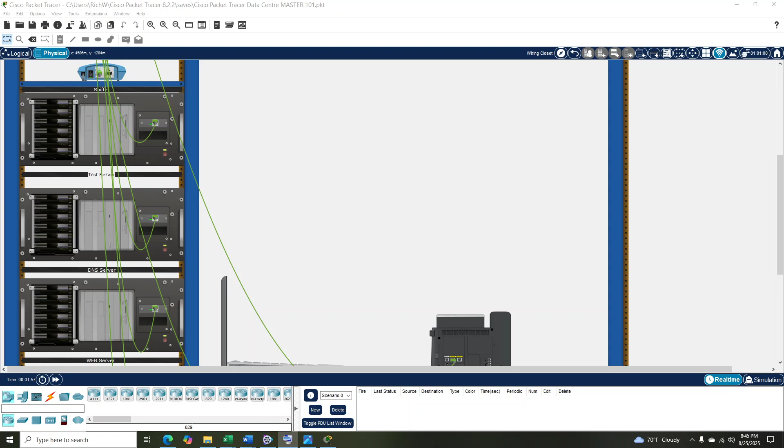It's going to be our piece, our DC1 server. DNS server, that's all set up.

Web servers set up, DHCP servers set up, and we got an Avaya utility server all set up, patched over Avaya, set that thing up, got the phones working. Now I do got the phones working, Cisco phones through the routers.

Let's see here, this is the headquarters. Oh, there's Bill Gates' laptop. It's all configured, Bill's phone number, can't give it out right now.

This is some testing, later in the video I'll explain this, and we're going to zoom back out. Over here I still need to wire these guys up back to the closet, and we have management over here.

And there's everything, there's a router. Don't have the phone set up or laptop here, but we got all that done, and we will start it up in a minute here.

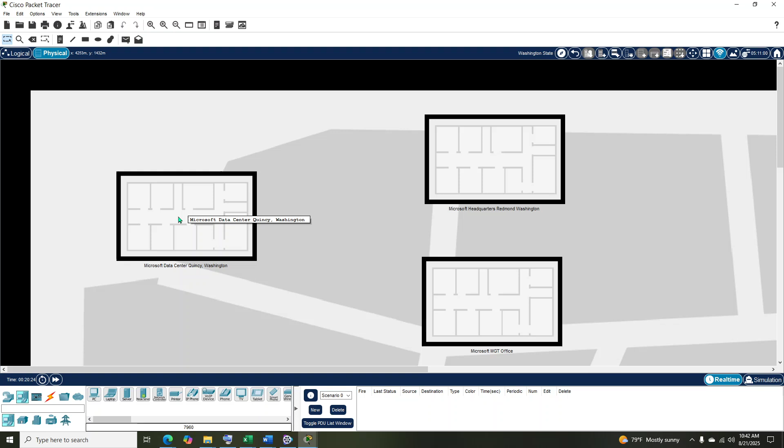On the data center, not too sure how many buildings they got there, but we just got one big building right here now. So we got the data center, and we've already put in our main wiring cabinet.

I've already started here with the racks. I've got 4 racks, another rack over here. I've got a laptop and an IP phone, and put a server in there. So let's start putting stuff in there. What we need, it gives you the power. We'll put power up here.

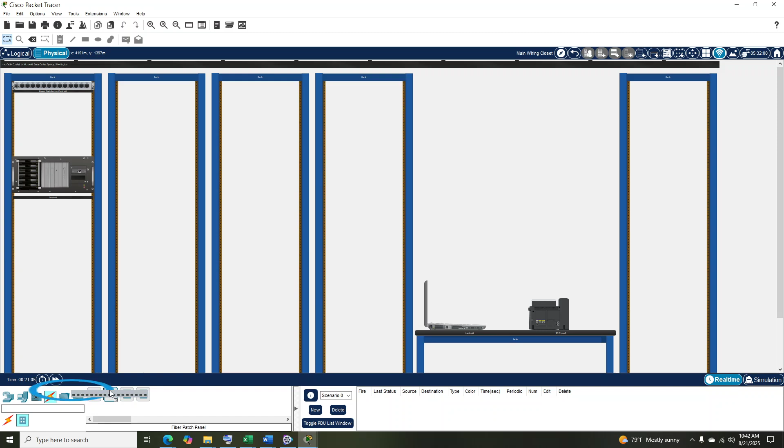And we're going to start adding some things that we're going to need for this. We're going to need a fiber patch panel, and we're going to need a copper patch panel. Put that there. We're also going to need a, let's see, we need over here. We're going to need...

A switch, layer 3 switch. I believe this one here - no, that's not the right one. We will delete that, and let's see, this is the one I was going to use. It's our fiber switch there, and this is our layer 3 switch here. I'll cancel that, back up to here.

Alright, we'll space it out a little bit. Put in a server, and let's just start popping these servers in. Once - there we go, put that at the top. And we're going to need a switch.

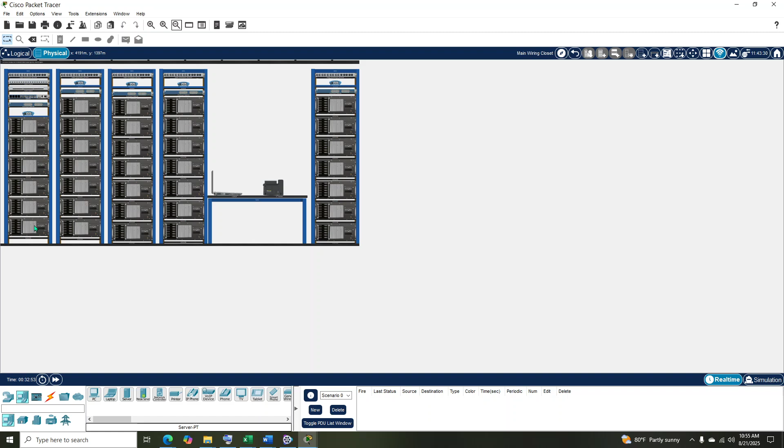Okay, got a little room here. But if you put fans and everything else in here, which we can't put - no, they don't have fans in here. These fans are on the top, and they're rack fans that blow down. Plus, you got air conditioning in this room.

Let's see. All right. Okay, we don't need that - I didn't just realize that, but we'll leave it there anyways. All right, still a little cleanup here.

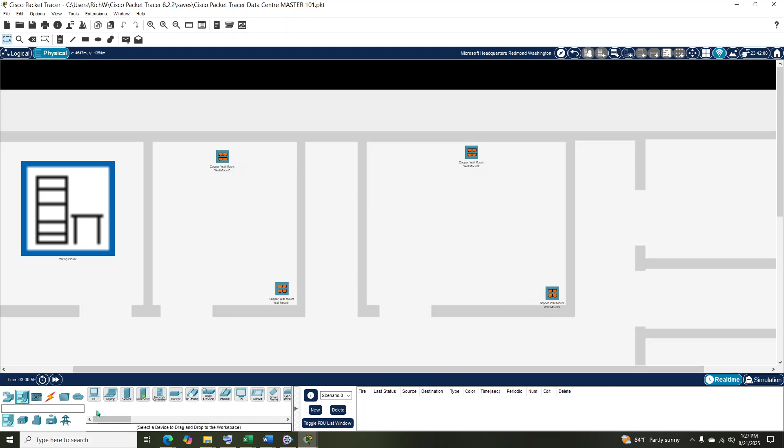Okay, now we're going to get some PCs. Okay, we're going to save that. Okay, we haven't done the wiring yet. No wiring yet. Setting everything up.

Okay, it's at a wiring closet. Okay, there's our wiring closet. And I'll just kind of do the same setup here. Let's see, get a rack in there, a server in there. Distribution.

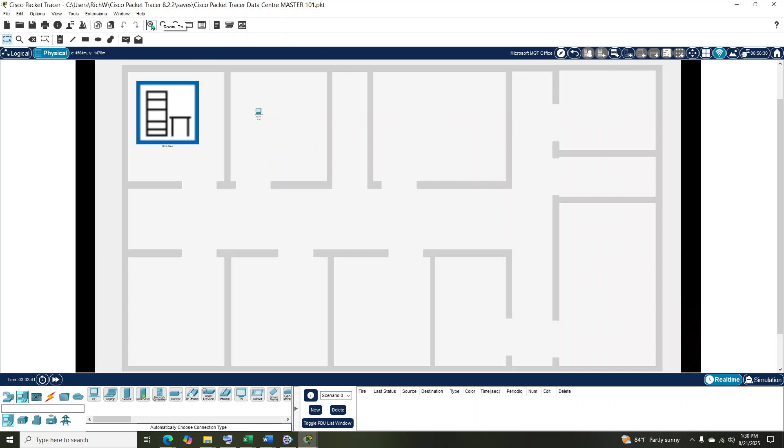Okay, let's see here. Let's see. Okay, we'll go back to the office and we'll do the same setup here. PC, PC, PC.

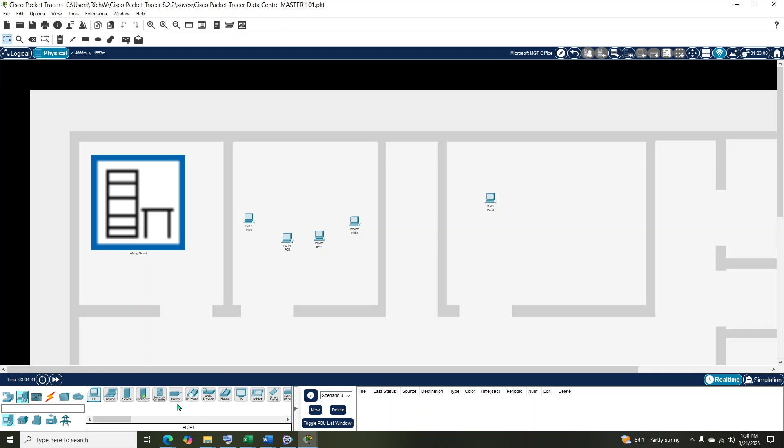We also want to put a printer over here. I forgot to put the printer on the last one. Put a printer there, put a printer over here. And we're going to put some phones in here too, IP phones.

Okay, these would be like cubicles, we'll call these like cubicle. And let's get the copper here - copper here, I don't want that one, I want this one. And one down here and one down here. And let's get our phones over here. Okay, let's see, IP phone here, going here.

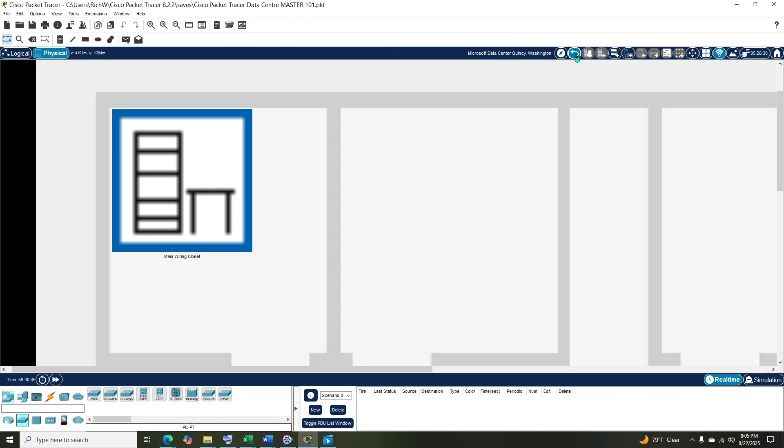There's a sniffer in each. I'm gonna tie these to the switches here. Let's see, what we're gonna do is go back out first, and we're going to start doing the gigabit.

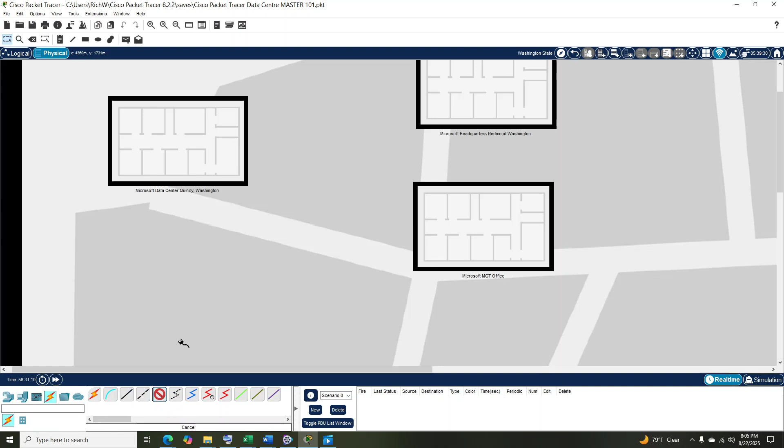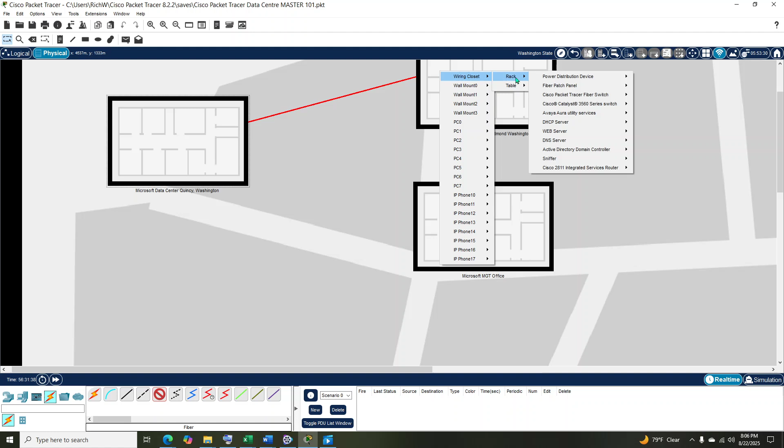Fiber. Wiring closet. Okay, we're going to do the punch down. Punch down 1. Okay, let's see, wiring closet, patch panel, punch down number 1.

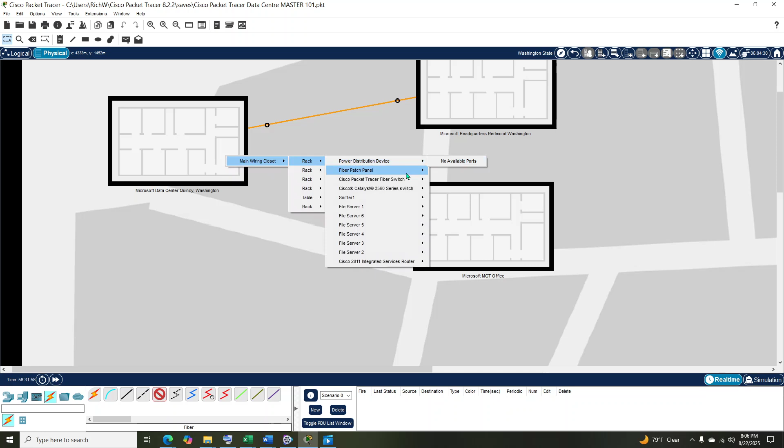Got that, let's do another fiber cable here. Grab the fiber cable and pop this guy. Let's see, this guy, and we're going to go to punch down number 2. Hit this guy with wiring closet number 2, keep it consistent. Alright, he's 2. Okay, he's 2.

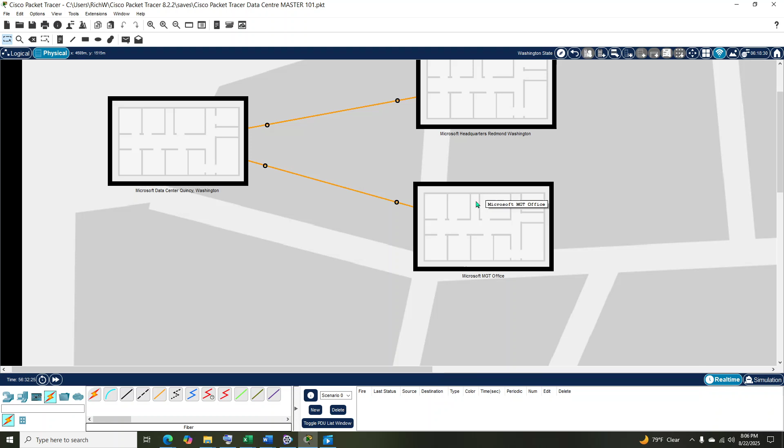And I'll go do this one. Let's go another one, fiber. We're gonna grab this guy and rack fiber. Punch down, we're gonna go 3 with this guy. Punch down 3, and this guy's gonna be, we're gonna go punch down 3.

Okay, let's see, move this down here. Move that over there, move that down here, go up here. Let's do it this way. And that's good. Yeah, good enough, alright, got that.

Little closet, it's data center. Okay, there's our 2 cables we did, and they're on this one and that one, and we have 2. We're gonna have to add to this thing. Let's grab a cable, it's fiber, and we're gonna go with number 1, and we're going to hit this guy.

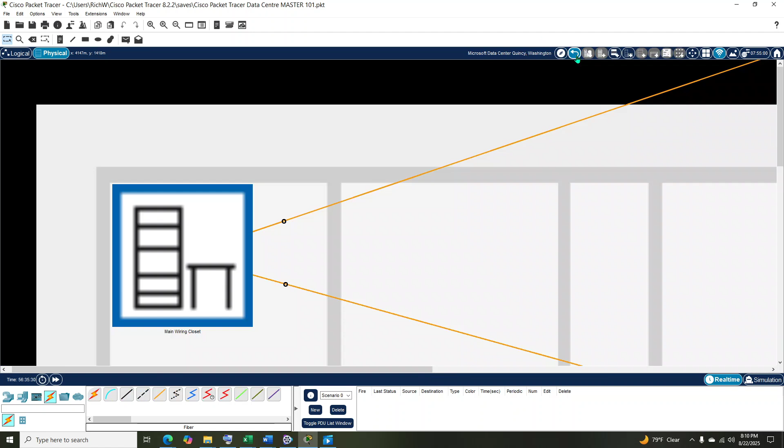Okay, we gotta go and hit, let's see. Alright, we'll go back to this, we're just gonna do the fibering. Okay, let's see now, let's go to this guy, and there's these, let's get some fiber. Hit number 1, there, I'm gonna do fiber, into there. Lights are starting to flicker.

Why not? Well, that's probably going to be the other one. Okay, let's go back, go back, go to this guy. Well, I gotta make sure I'm getting these right. That's on 3 and 2. Oh, I gotta make sure I put them in there right. Let's see, maybe that's what I did wrong. Alright, hold on.

Fiber, so it's on that one, that one, alright. That green light went on, good, our yellow light should go green. So on this one, and that one. I think we got something wrong on the other one, let's go back. Let's see. Yeah, they're not in right, hold on.

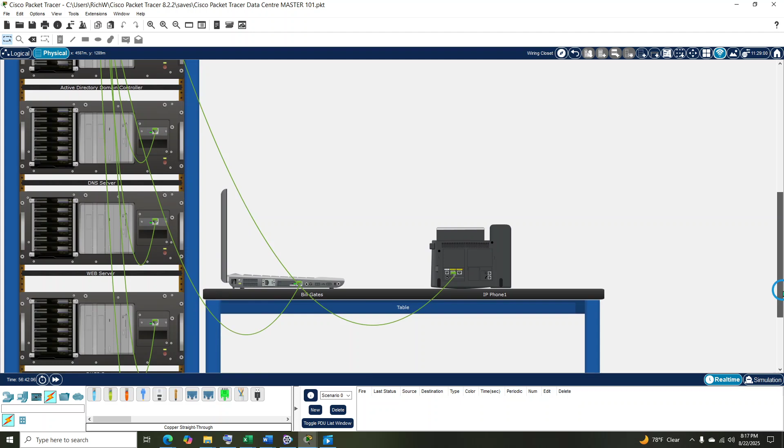There's our power distribution devices, our fiber patch panel, our Cisco Packet Tracer fiber switch, and here's our Catalyst 3560 series switch, layer 3, the Cisco 2811 router, and I got a sniffer. We've got Active Directory domain controller connected, DNS server, web server, DHCP server, and Avaya Aura utility server. We're going to configure them all here in a minute, but we're just doing the wiring right now.

Okay, this is all done here. Headquarters is done. I still got to do this. Now do all this stuff here. I think it's going to go to the wall here. We actually need 2 of these.

This is for... we'll put it for this now. We're gonna have a whole lot of printers. Where's my printers at? There's a printer, putting a printer over here, which means I'm gonna need another one of these guys.

Copper, we're gonna need another copper. Put a copper right there. We're gonna need a printer, and I'll put that over here. Put that over here. Over here. Alright, let's see.

We do the patch panel on these. There's a lot of them. Let's see... we're gonna go... no, we don't want that. Copper straight through here, and we're gonna go here first. Rack, and here we go.

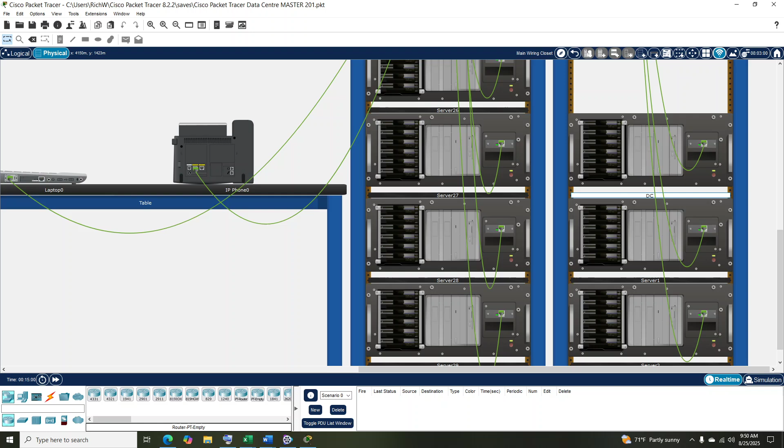Did I wire everything over here? Hold on. I think so. I just have to configure a test server, probably a domain controller here. We'll do a caps on that. Domain controller, database number 1 for now. Let's call it that.

Okay. Oh, my amber lights, see these are there. See, they're green, one was going amber on me. I'm like, what the hell? And that's the fiber. Oh, you see, I got all the right there. I've got all the plates in there, no holes, and these are the only two I need.

Think I'm gonna be... no, I'm done with that, I don't have to configure that. I have to configure... I don't have to configure this for phones, so I don't know if you need no band VLANs or anything for that. This is just a data center.

I got a router, shoot. I know I got a router name. Do I? Yes, I do have a router name. Copy, this is what we are using. Maybe I'll change that, Control V. It's a Cisco 2811 layer 3 switch. And we are going to do this and change the name, baby. Paste, okay, enter. This is down here. It's... let's see.

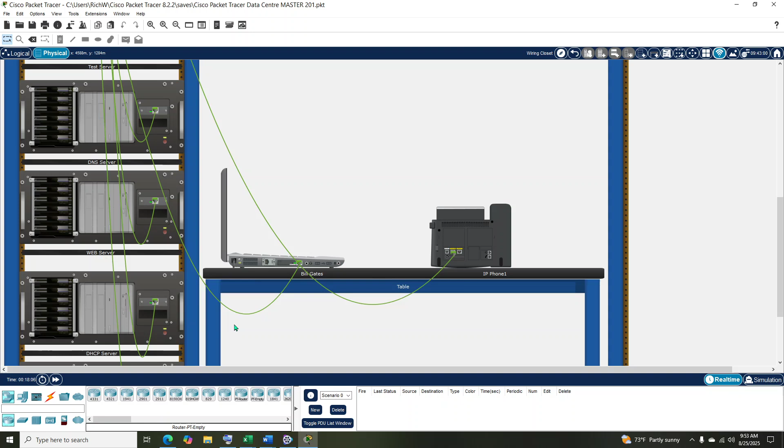And hopefully the name stays there. But we're going to do some configuring in the database, we got to do the DNS and all that. We are going to do all this right here. Right here at Bill Gates - Bill Gates, there's Bill Gates' laptop, there's his IP phone. I can't tell you his number. You can't call him, but there's his number. If you look, you could have saw his 4-digit number, but we can't allow that.

Alright, let's see, Bill Gates, get rid of Bill Gates. He's not a chumper, but I don't know.

Let's see here, test server. I think we need to make this domain controller number 2, we'll say. Let me see if I can do the config. Gotta give it an IP address and all that stuff. Let's see what I'm gonna give the domain controllers.

Let's see. Domain controller, we'll give it .10. Might as well. 192 - using a Class C address and scheme here. 160, oh shoot, is it? Yeah, 168. .0.10 for this guy, that's going to be DC2.

I'm going to put location 2. Display name did... what does like DC2... is this DC2 or... let's go DC... let's go... I'll call it DC data.

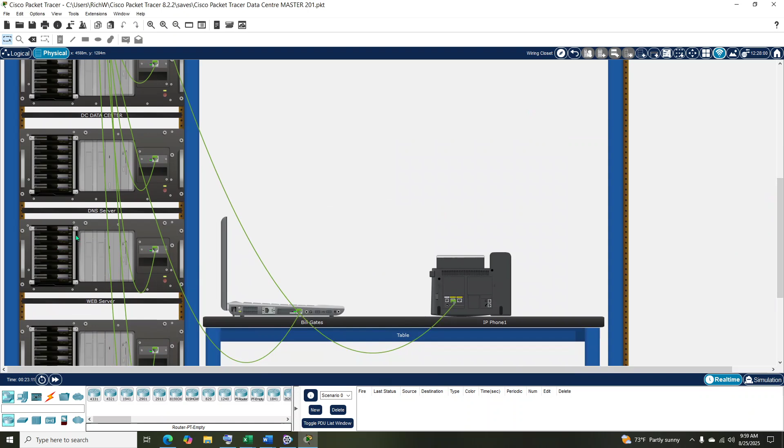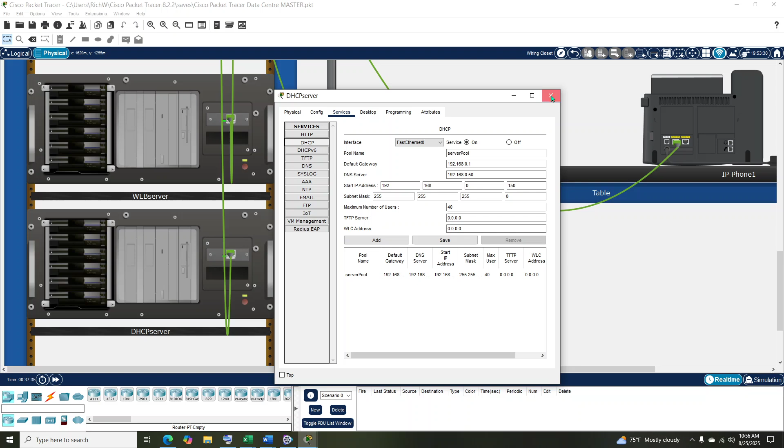Back to DHCP here, had a little issues. I'm not configuring switches yet, so I had to reset it back up. And here we go, it's server pool is turned on, and it's going to start at 150. Start giving us IP addresses at 150, and we got 40 maximum users, and this is just DHCP setup. We're going to do DHCP setup on routers for the phones, for VLANs and stuff, but for now, basic DHCP setup.

Kill that, back to that, and let's do this. Desktop IP address, and it's got a 151, so that's good. And I think this one I've already did, let's see. Yeah, I got 150. And this one is going to get, we're going to go back and you got 152, that's good.

Alright, it's got everything, the mask, default gateway, DNS, we're supplying everything there. And I think this is this one, and desktop, and DHCP, it should be 53. Yep, 53, and we're going to do the printer, and yeah, I got a 54.

So configure the printer and start printing from here. Let's do these. DHCP, 155. Well, it should be 156. 157. 158.

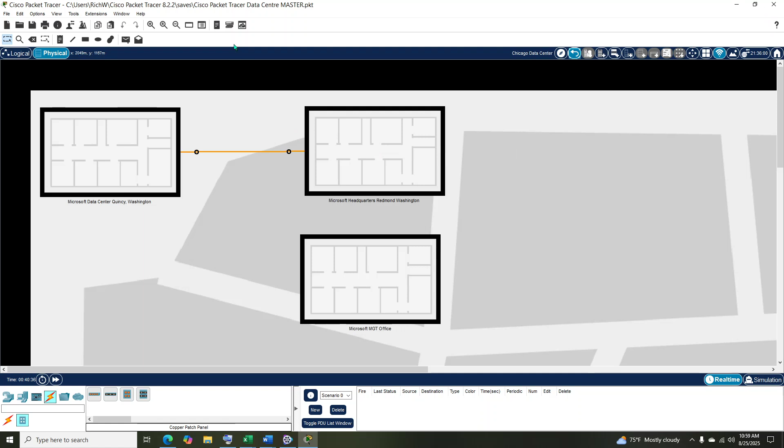Oh, I'm in a... oh, here it is. I'm in the wrong one. Shoot, alright, hold on. Close, yes, okay, Cisco packet tracer. File, open, wrong folder. What's this one? Cisco. This one I thought I was doing. Oh my god, hold on.

Let's see, plus, DHCP. Configure services DHCP. We are going to remove that one and remove that one. And this one is going to start at 150, it's at 150, and we're going to have 40. Setting up DHCP here, that should do it. Default gateway is going to be copy. Paste, backspace. Our DNS server is going to be copy, paste, backspace, save. Okay.

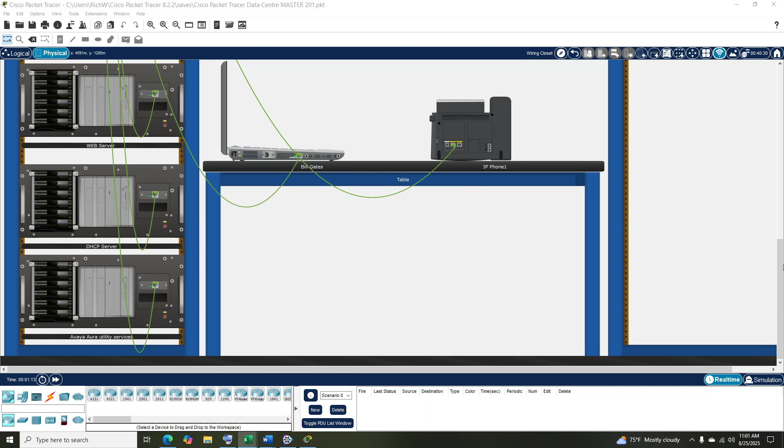HTTP setup. Alright, let's go back to here and, 150, got the IP address. Let's see, alright, 151, yep, let's get in the gateway and the DNS.

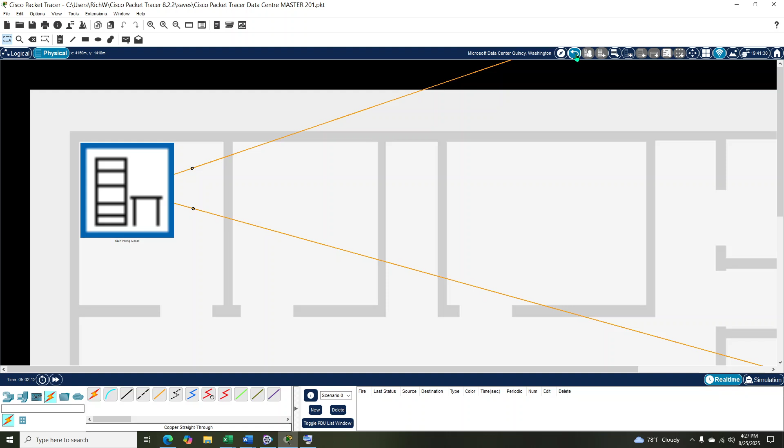152. 153. DHCP. There's my Avaya Aura utility services. Server, big, and let's see, versus DHCP. Okay, this is all set up. It's going to start at 150, we already know that.

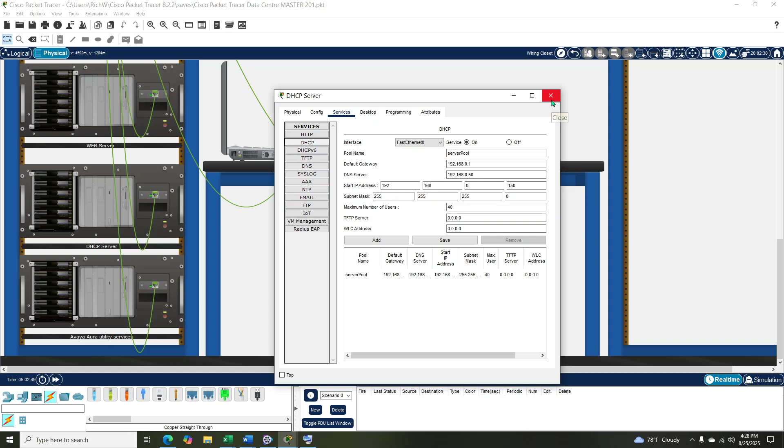Let's see, I've done the, I want to look at the routers. Okay, we are now in headquarters, it's the headquarters, and I did make the connections. I didn't have the connections here from, oh, this is it, this is it, the gigabit switch. What I wanted to show here is I had to add this for the connection to the switch to the other gigabit port.

So I added a single port Cisco gigabit Ethernet network module right there. So I just what I did was turned it off, went like that, and we just added that. Okay, not using it, but it's just there. Okay. Configure, oh yeah, turn the device back on, it's back on.

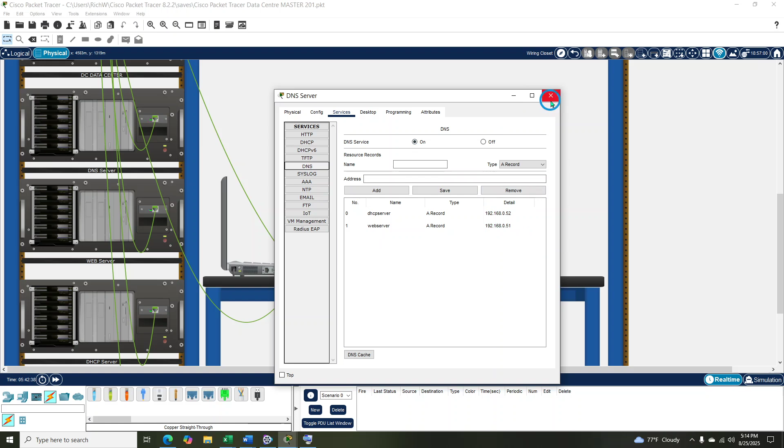So this is, we could go out here, and go over to the management office and do some pinging.

There you go. Copy. Okay, see, I made two records there, so you can ping it by name or IP address. There's the 0.52, that's 0.51. So DNS is working, and this should do it there.

Let's back it out. Okay, and there you go, there's our data center. There's our data center, so there's our center there. This should be over on this. Well, I had on this one. It doesn't really matter, I guess.